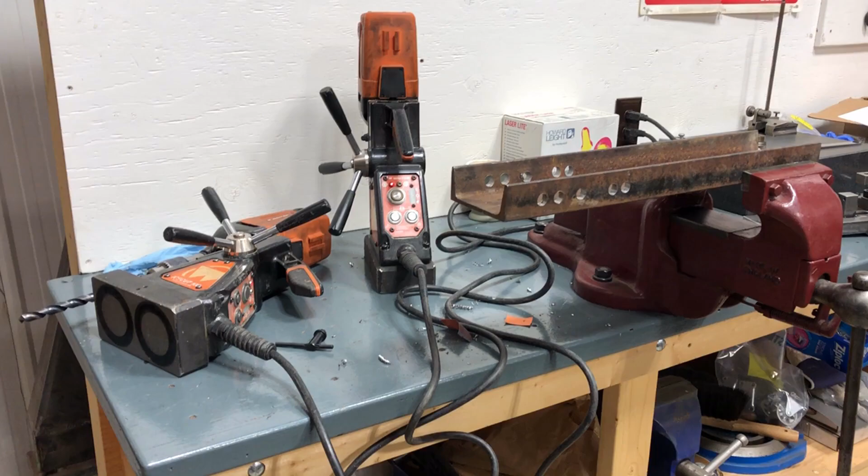Hello. In this video I wanted to talk about designing and building a drill fixture for a customer. This is sort of typical of some of the work I get in my shop. I don't just get drawings and asked to build them. Sometimes a customer comes to me with a problem and they're looking for a solution.

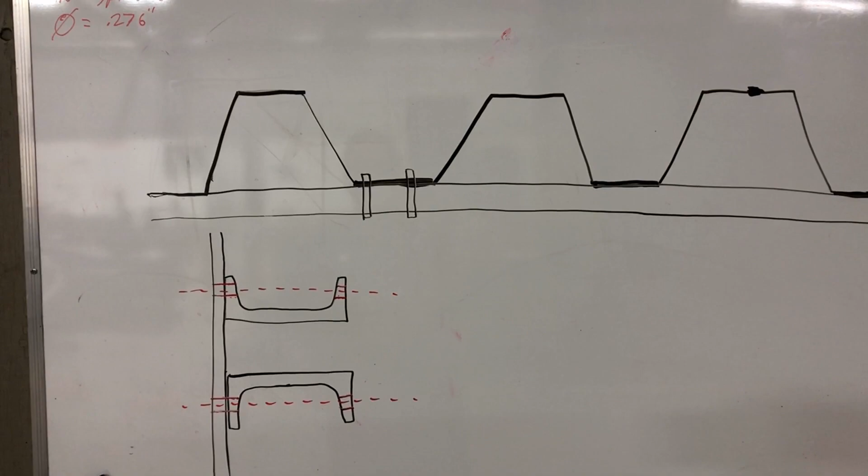The problem given to me to solve was to find a way to drill through both sides of a C-channel and a piece of sheet piling. The customer is building a wharf, and the way it's built is they drive sheet piles around the perimeter into the mud in the bottom of the lake, forming a wall, then backfill the cavity made by the three sides of the wall, and cap it with concrete.

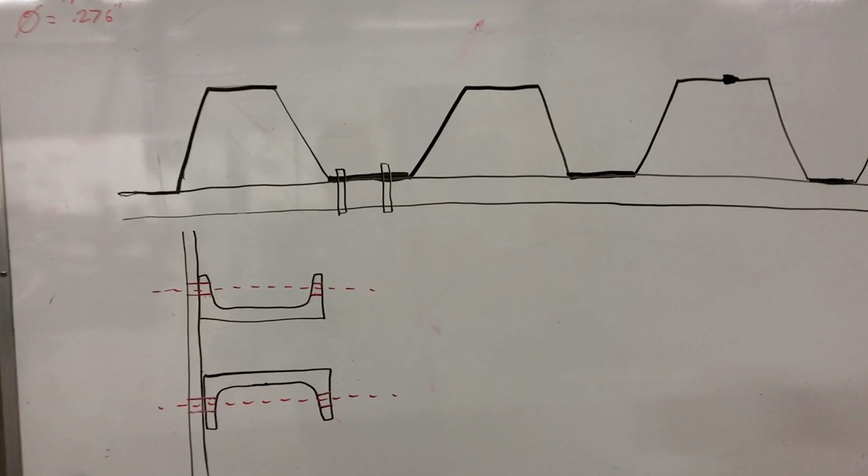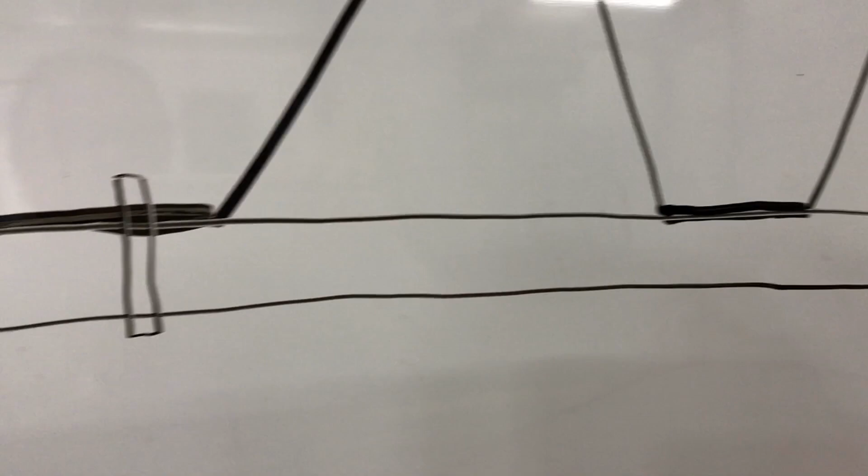Anyways, the sheet piles are driven in. This is what they look like from the top, like they're corrugated. Then what they want to do is run a C-channel along them, which is called a Waler, and bolt the Waler to the sheet pile.

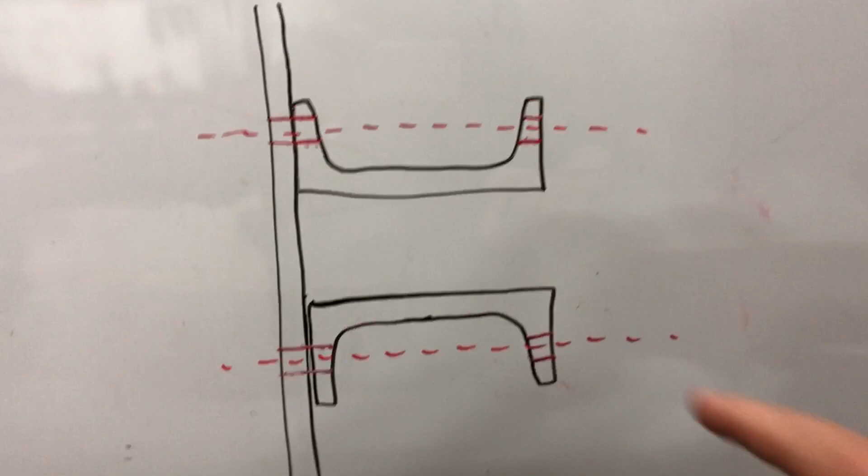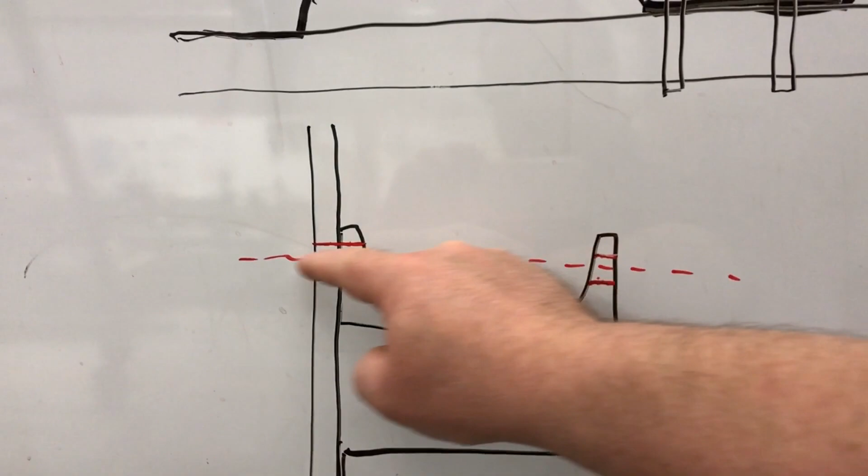So this is a section through the Waler, and it's just two C-channels, bolted through the holes shown in red, with the dotted red line being the center line of the bolt. What they do is put the Waler up against the sheet pile, then tack it here and here just to hold it in position until they can bolt it.

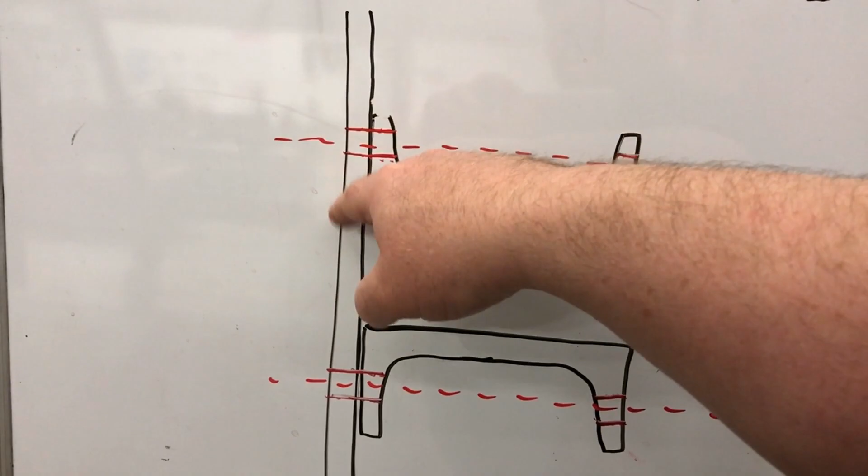The problem they were going to have was trying to drill a 1/2-inch hole through both sides of the channel and through the sheet pile, which is about 3/8 of an inch thick. So they asked me if I could come up with a fixture to help them drill that.

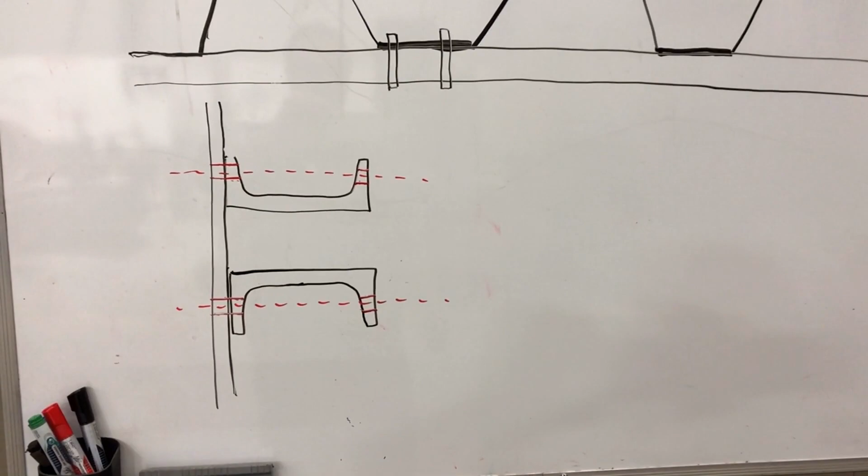They told me they had 2 magnetic drills, and based on that, since I have a magnetic drill with about 7 or 8 inches of stroke, I based my design on that and went ahead and designed a fixture. I got the design about 80% done.

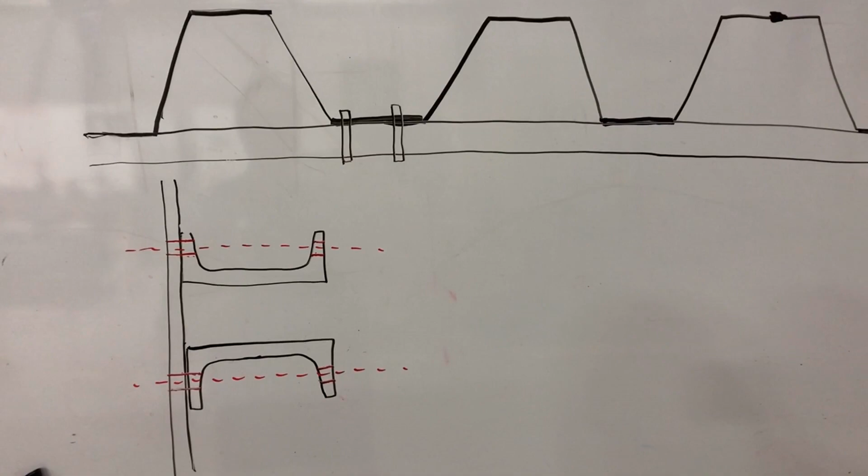When the fixture was about 80% done, they brought me their magnetic drills, and these are them here. It was at that point I realized these things have less than 3 inches of stroke. The channel's 4 inches wide, the sheet pile's 3/8. I need 5 inches of stroke at least, and I wasn't going to get it with this.

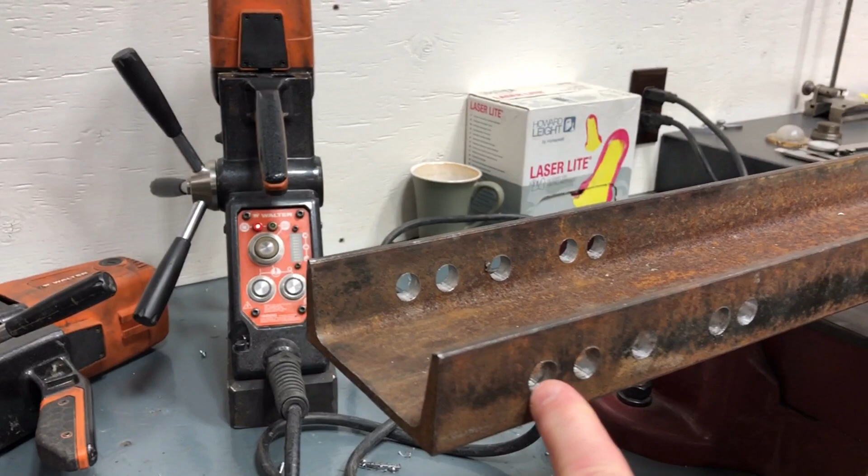So the decision was made that they would lay out all the beams, mark the locations of the holes, bring the beams to me, and I would drill them in my shop. This is just a piece of channel the same size as what they're going to use. The plan was I would drill through here, then they would weld this to the sheet pile, and then they could use the holes I put in as a drill jig to drill through the last 3/8 of the sheet pile.

So what I did was try to figure out how I was going to drill all these holes. There are 400 holes to drill.

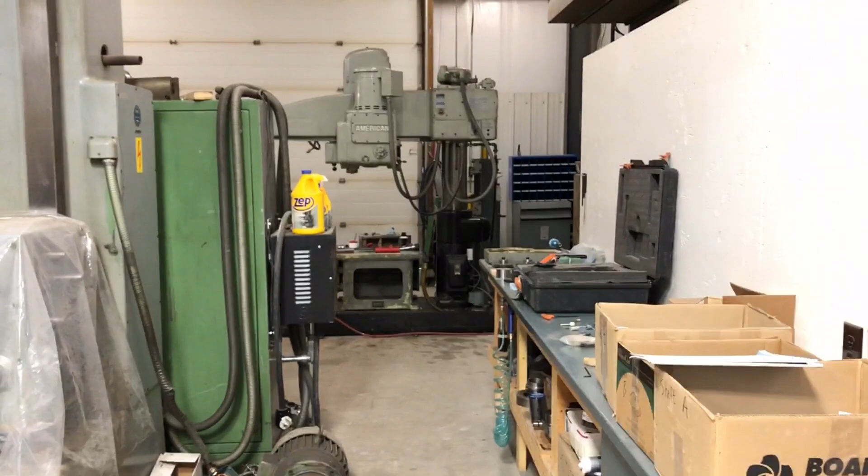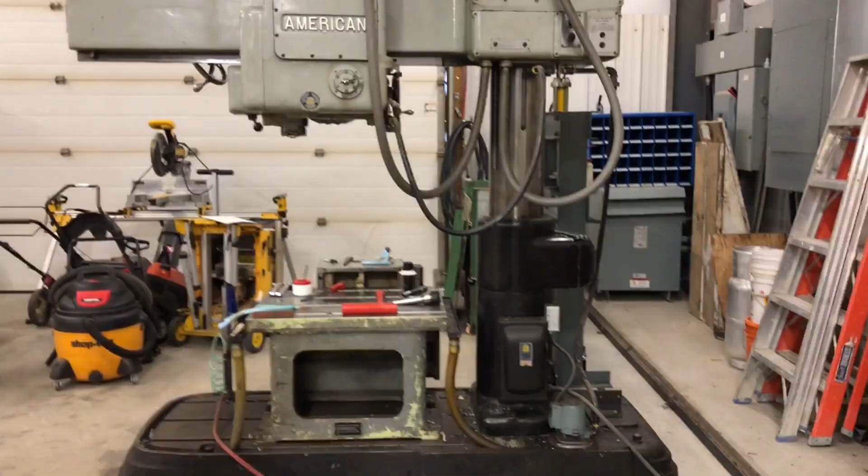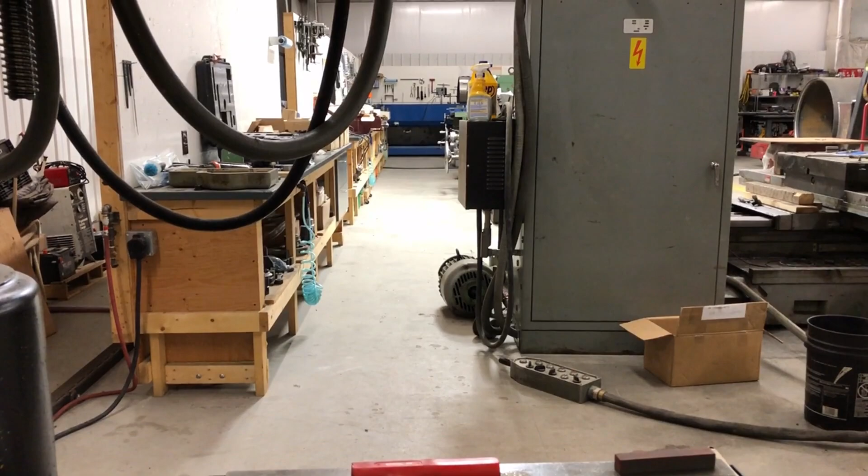When I set my shop up, you can see down there is my radial drill, and behind it is the shop door. On the other side of that door I've got about 100 or so feet to the road, so I could conceivably put a piece 100 feet long in that direction. Then I line it up with the walkway in front of my workbenches, and I can go all the way down to the blue lathe at the far end, about 60 feet. So I had set it up so I could put really long objects on my radial drill.

So that was my initial thought. But the beams are 40 feet long, which isn't a problem for length, but they're 200 and some pounds each, and I'd have to move them a lot of times by hand. I realized that's just going to be way too much work. So, I have a magnetic drill, as I mentioned earlier.

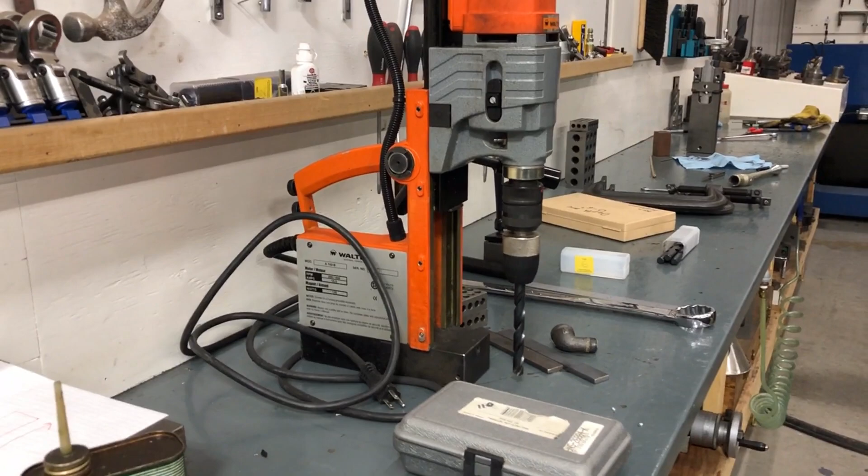It's this one, and it's got more than enough stroke to do the job. So I thought, well, I'll design a fixture for it, and then I'll just set the beams up on sawhorses and move the drill and fixture down the beams and drill them myself.

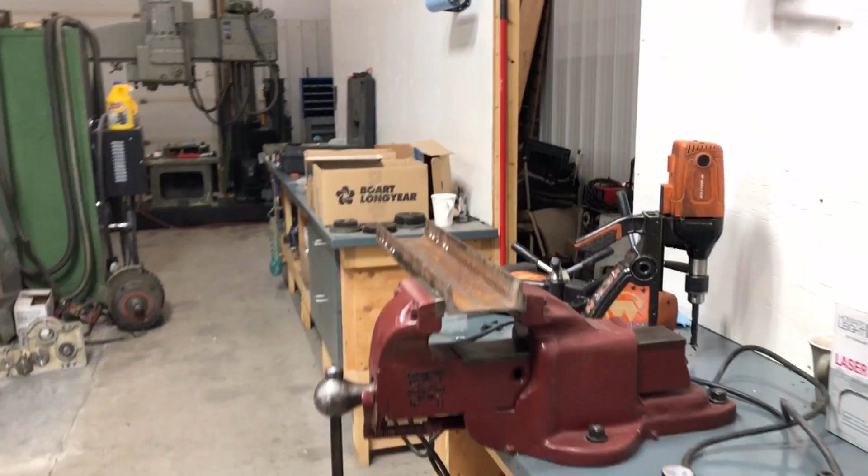I didn't want to use the same fixture I'd originally designed for these when I first thought they had enough stroke, because I had this design where I couldn't grab the back of the beam due to the sheet pile being there. So I had some fingers to grip, but I wasn't completely happy with the design, so I thought I'll design something better now that I can take advantage of clamping at the bottom of the beam.

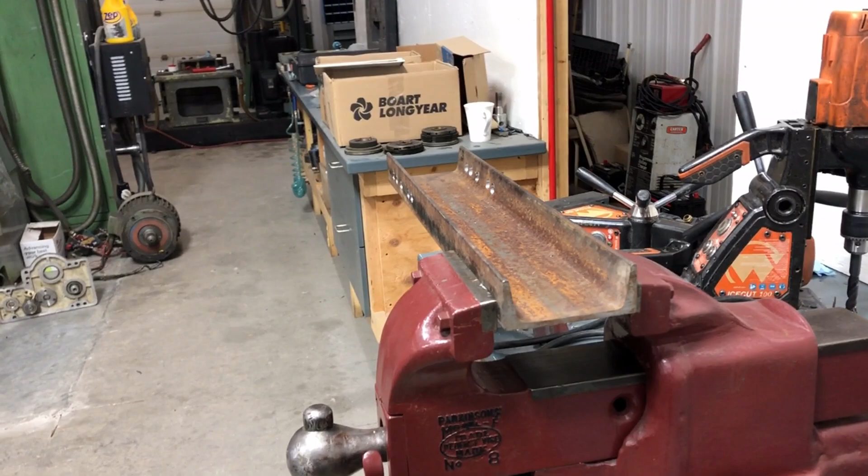So I got that pretty much 100% done. I'd made drawings, it was about to start, and a customer called me back and said that they had concerns that they may not be able to get the holes marked accurately enough for me to drill them in my shop. I agreed that probably was a concern, and they were worried that I would drill all the holes, they would set them up, and they wouldn't be in the right spot.

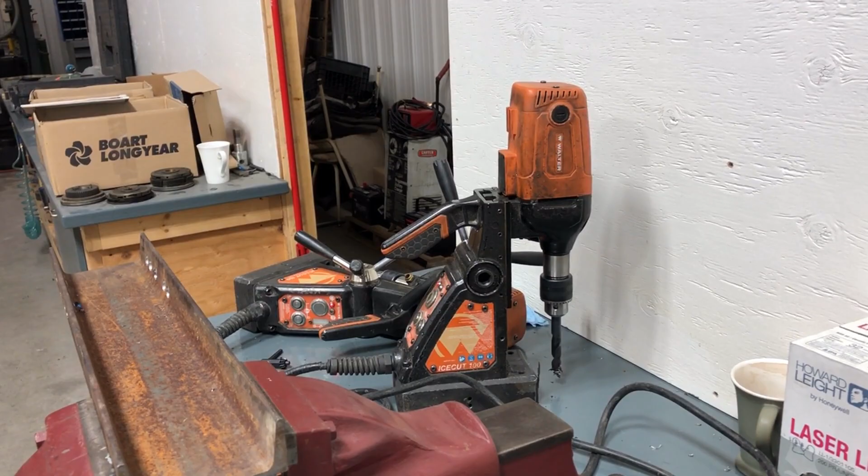So we went back to the idea of drilling with their short stroke magnetic drills. So I had to come up with a fixture. What they decided to do was, like I've got it shown here, put a short bit in one drill to get through the first side, put a long bit in the second drill to get through the other side and the sheet pile.

Now, the owner's manual for the magnetic drills shows that to develop the full strength of the magnet, you need at least 1 inch thick plate. My original design for what I was going to use in the shop was going to be thinner than that so the fixture was light.

Because the drill never needed to be removed from the fixture in the shop version, I was just going to put a clamp over the front, and then it wouldn't matter if the magnet was at full strength or not, it could never lift off. But with this setup, you clamp the fixture to the beam, put the first drill on, drill, take the drill off, put the second drill on the same fixture, and drill the other side. I couldn't really clamp it, it would take too long to clamp and unclamp.

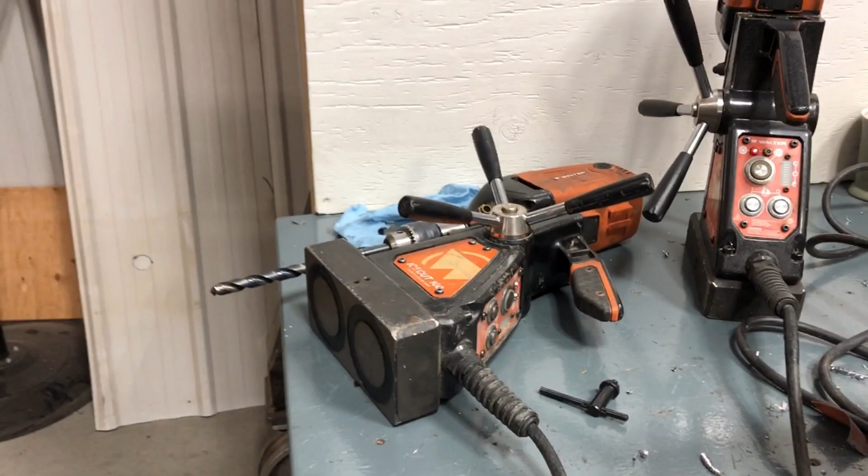So I had to go with a thicker, 1 inch plate. I didn't want to go with thinner plate because these drills are used in a vertical configuration where the magnet is up and down, and they're drilling a horizontal hole over water. So if the drill was to let go, it would fall into the water. I had to use at least 1 inch thick plate to make it safe. We couldn't really have any external safety clamps because it'd be too slow to undo that stuff. So we went with 1 inch thick plate, and I started round 3 of the design and designed this fixture.

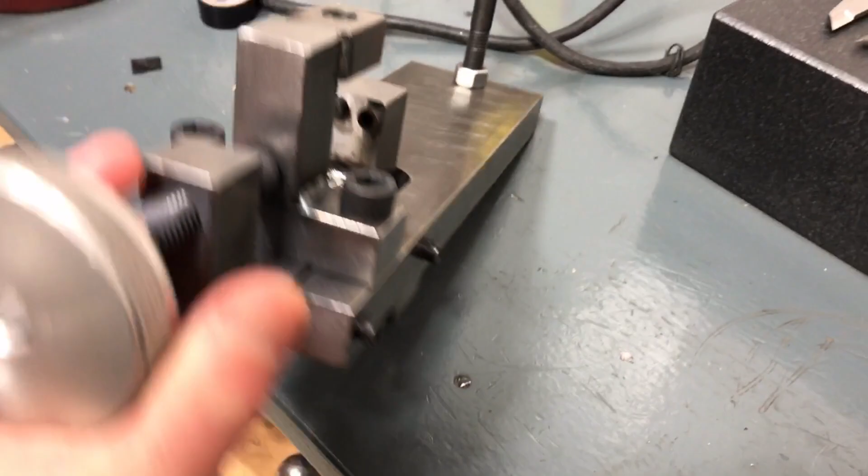And so this is the one we're actually going to use. I'll show you how it goes on the beam.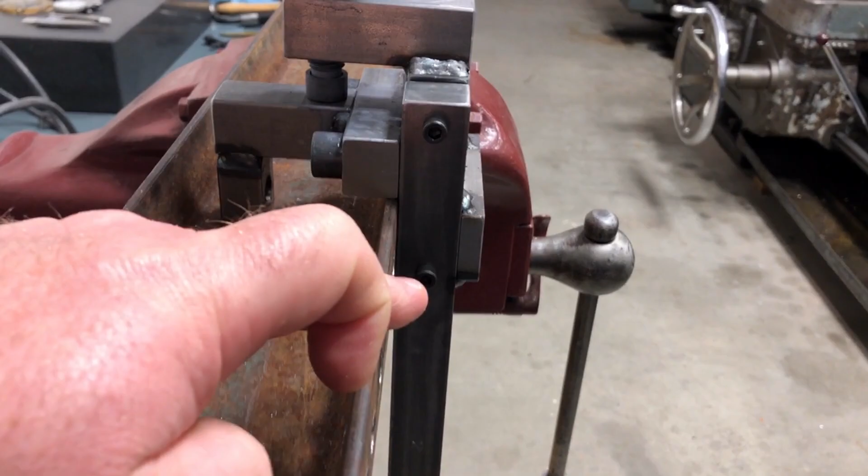So the way this works, you have this plate. The magnet on the drill will attach here. It's flat and thick, so it'll attach very strongly, I guess you'd say. This underneath here sits on the top of the beam so that the hole is the correct distance down from the top. There's a hardened drill bushing here to guide the drill while it drills through this side.

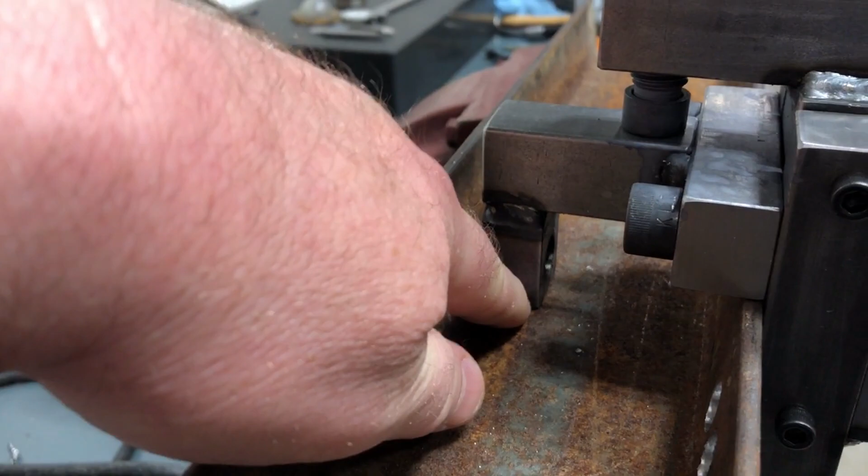And then over here we have another hardened bushing, and that guides the drill to go through this angle, which is hard. You have to guide the drill to start in that, or otherwise the drill, when it hits, is just going to walk up the angle.

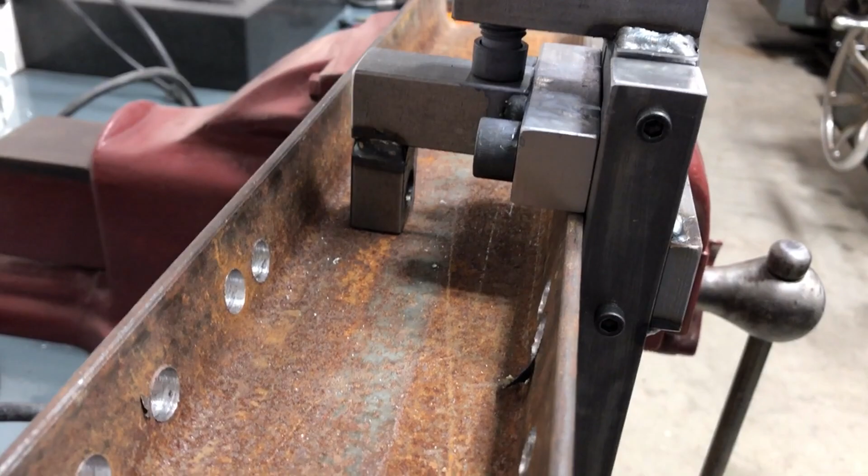The distance between the bottom of this support and this support is made accurately for the beam. Then what you do is you clamp this down like that, and the friction here and here holds the fixture in place while you drill.

That was the pretty straightforward part. It wasn't very hard to come up with that. The tough detail on this was getting the clamp, and I had all kinds of ideas how to clamp it, but I had to keep in mind that this fixture needed to be easy to use and quick, because they had a lot of holes to drill.

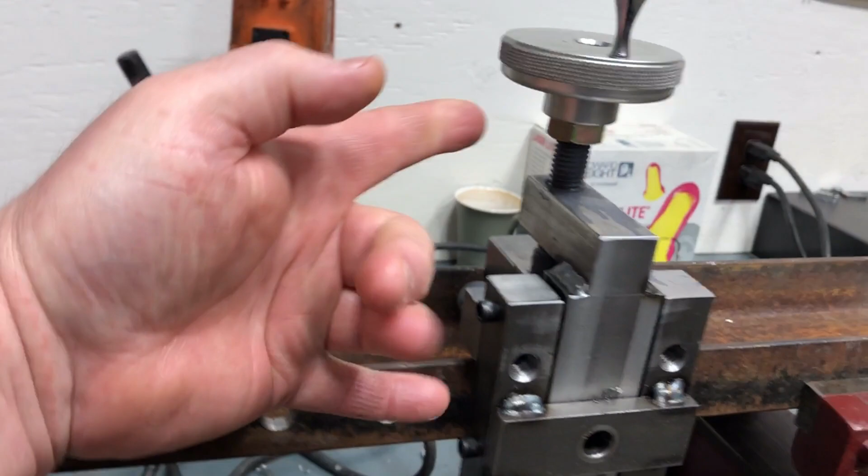I had thought about having a C-clamp that would sit like this and swing out, and I had all kinds of ideas. Finally what I hit on was a C-clamp that you could actually drill through, and that's what this piece is.

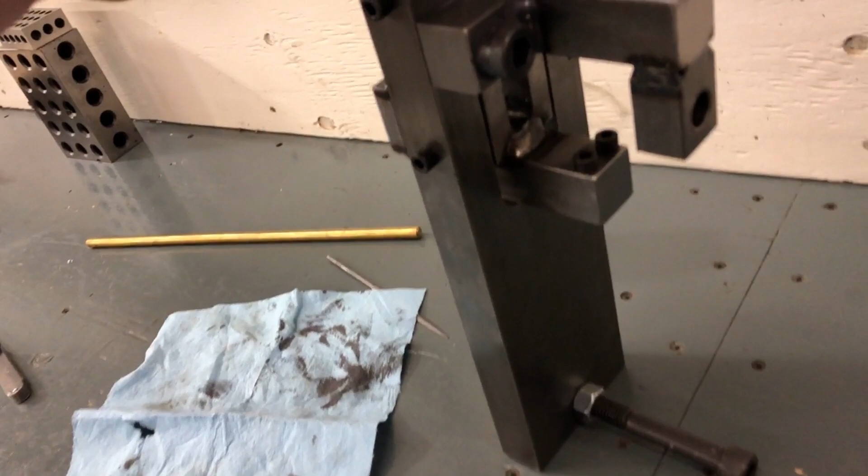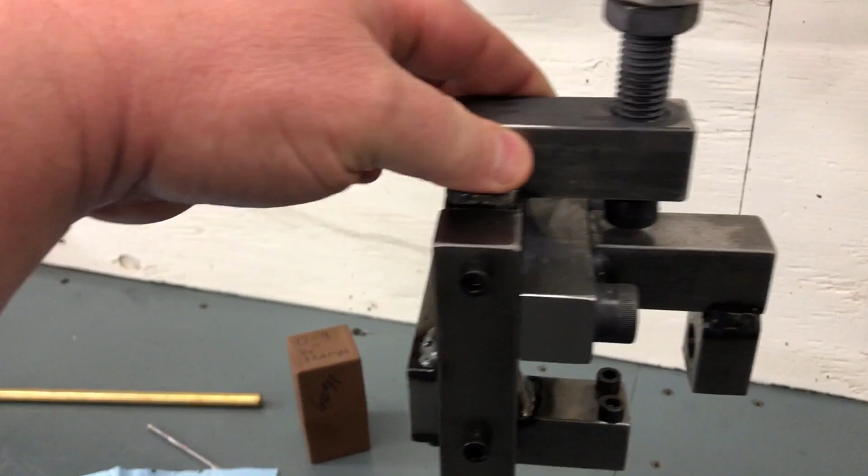You can see on this fixture, which is just a copy, they wanted 2 fixtures. You can see the part that's moving is my C-clamp, and the C-clamp is loose, but it's restrained by 4 bolts, and there's slots on each side so that the C-clamp can't fall out and go in the lake, and it's kept roughly in position, but it's loose and can move however it needs to, to clamp.

I put a couple of socket head cap screws here as the clamping surface on the bottom because I wanted 2-point contact to help prevent it from pivoting. Then the top is just a 5/8 screw, kind of like a set screw with a swivel end on it.

This would only work if I could sink this. There was no room for a C-clamp, that was the problem, until I came up with the idea of burying the C-clamp inside of the drill fixture itself. So that's how we got this design.

Then this other problem was we had to drill through the C-clamp because it was going to be right in the way. So that C-clamp ended up being slotted, and you can see how the drill can pass through. No matter where the C-clamp goes in its range of travel, the drill can pass through.

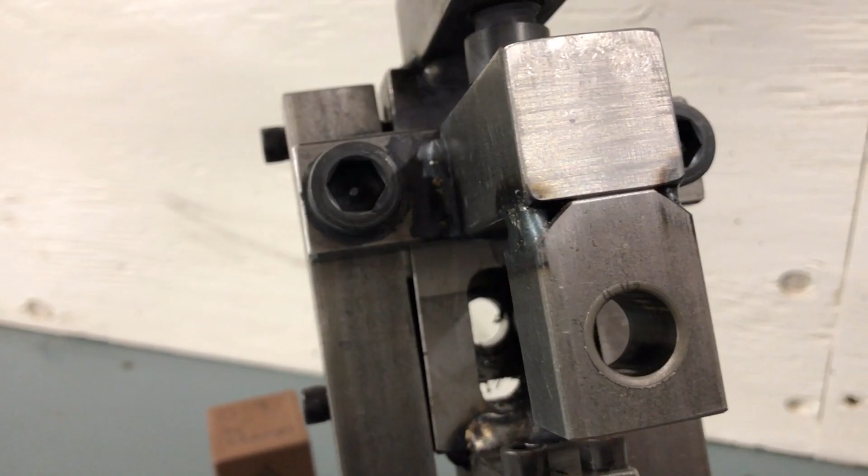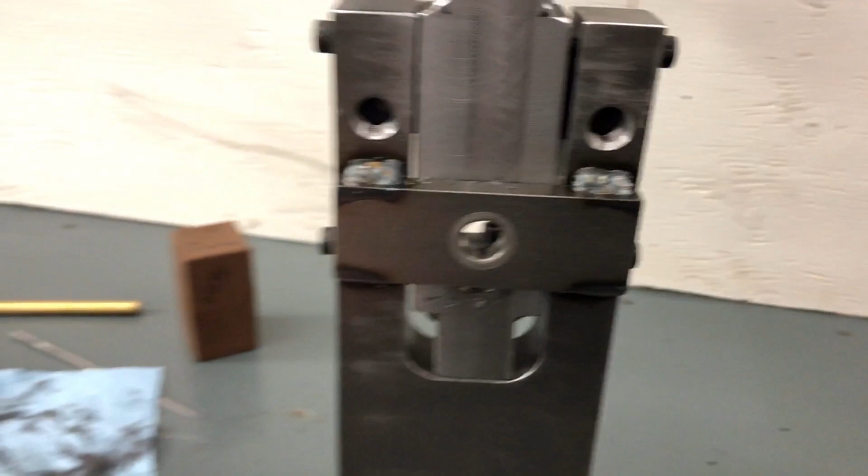So that was the final design, and it took me about 3 days to build both fixtures. One of the problems was I'd built drill fixtures before and never had any trouble using them in my shop, but there's almost zero clearance between the inside of a drill bushing and the drill bit itself.

When you're drilling out in the field - and I was just trying it out here with the piece clamped in my vise - the drill bit gets hot. You're not using coolant, and it expands and then it binds up in here, and it was really tough.

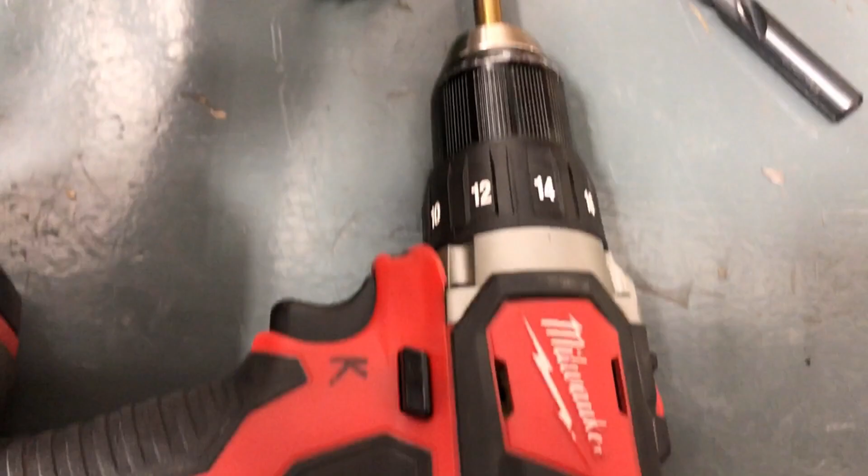So what we ended up doing was just making a homemade sort of half-assed hone with a brass rod and a drill, a bit of electrician's tape, and a piece of emery cloth. I was able to just spin it in here for about 5 minutes, and it sort of lapped away a couple thou, and now it works really well.

The drill bit doesn't bind, and it goes in easy, and it makes it fast, which is what's really important on this job.

So I'm just going to show how this works with the 2 different drills.

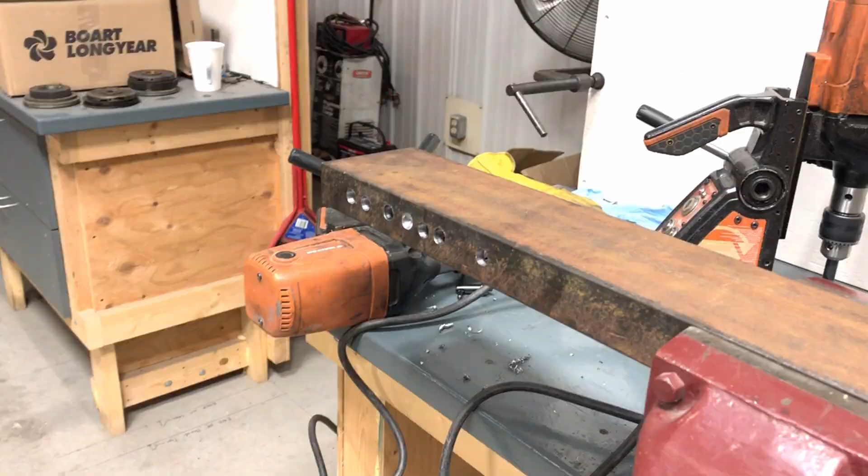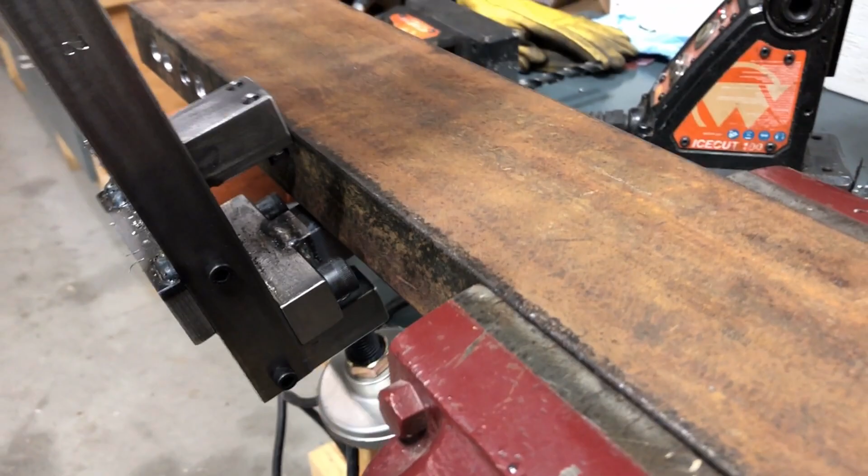The fixture also has to work upside down. So the channel is upside down because there's the lower Waler and the upper Waler. So I made it with a little extra, so it'll go on that way.

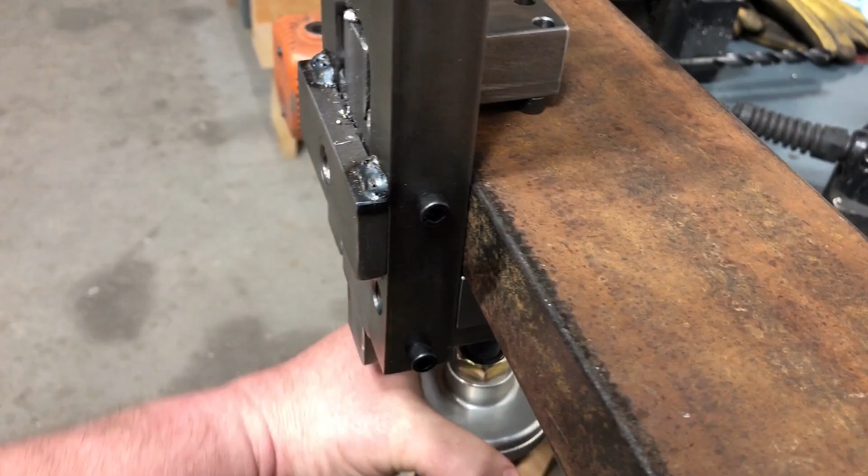Of course, you'd be doing this with 2 hands, so it'd be a lot easier. And there, then you just mount the drill upside down in there, and it works for that.

I think the customer's coming in this morning to pick these up. I gotta show them how to use them, but I think they should be happy with that, and it should make their job go a lot quicker, and they shouldn't have to worry about losing their drills in the lake.